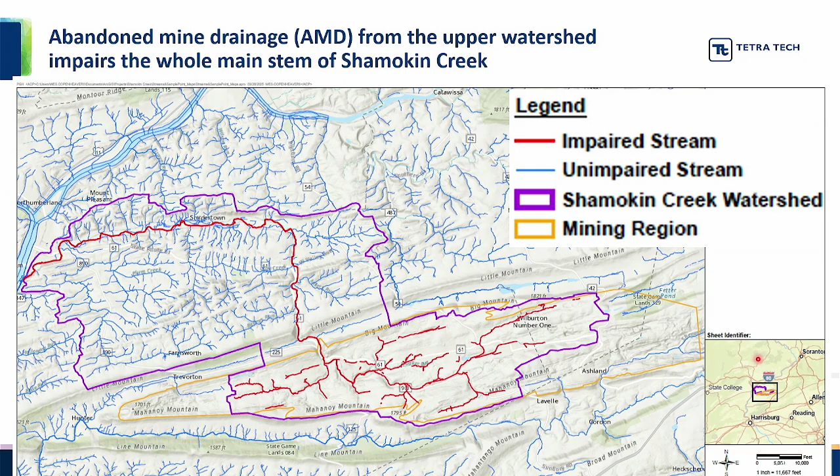And the red lines within the purple boundary are defined as impaired by the state with respect to having an absence of a fishery. And what you see is there's this so-called upper watershed, 54 square miles in the upper watershed, that impacts 16 miles downstream that could potentially be recovered as far as trout fishery goes, or we should say recreational fishery, if we were to manage some of the problems that are sourced from the upper watershed.

There's a very good report from USGS that looked at a lot of the discharges in this particular region, also looked at some of the groundwater conditions with respect to underground mine pools. There's already been work, and I saw John Dawes out in the hallway, and I said, you got the Super 7, but we got the Big 9, right? So the Big 9 have already been identified as some of the largest, most significant discharges in the watershed.

The black line here is that same purple boundary. So now we're focused in on just the upper watershed. These gray regions are the different towns in the area strung together along PA 61. And the discharges are tabulated somewhat in an upstream to downstream location. So the flow is coming from Mount Carmel through Shamokin on its way to Sunbury. The coding as far as the SR dates all the way back to Scarlift days as far as assessments.

And even though there's the Big 9, you can see that there have been identified many, many discrete discharges in this particular watershed. And we've heard a lot of numbers out there as far as these big high flow numbers and stuff. If we just sit right on Scott Ridge, that Q is the algebraic expression for flow, and the subscript 50 is the median or the 50th percentile value of Q from the 12 measurements that were collected most recently. So 50% of the time it's less, 50% of the time it's more.

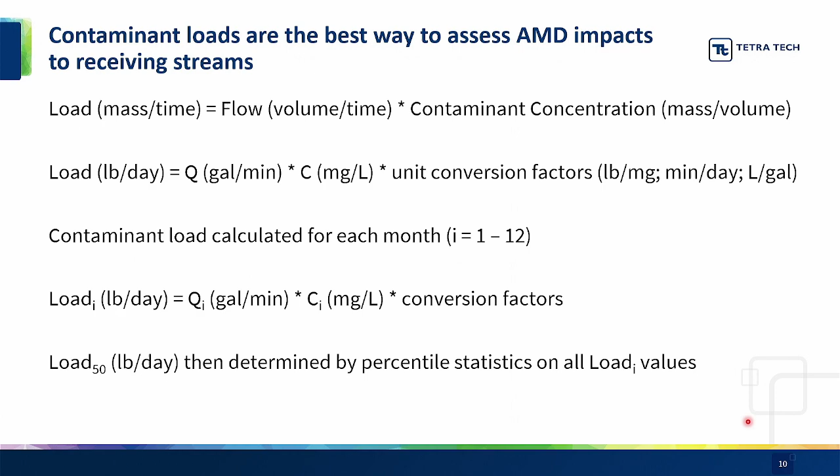And then so flow is one thing, but the other thing is the loads, right? The contaminant loads. And so load is defined as the flow, Q, times the concentration, C, where that concentration could be hot acidity, iron, aluminum, manganese. Those are the big ones that we're looking at, multiplied by a bunch of conversion factors, and then binned to do the statistics on the load values themselves. I'm not going to show you all the statistical breadth of these things. I'm going to show you load values, say, for iron at the 50th percentile. So half the time it's more, half the time it's less.

So if we just look at 50, and thanks to Bobby and EPCAMR, in the sampling strategy, they did upstream, downstream locations on the trib or the main stem for each discharge. So we have a location that is downstream of the discharges. And what we can see is that the water flowing out of the upper watershed is primarily mine drainage, right? 22 over 28 times 100% as far as how much of that is sourced from these mine pools.

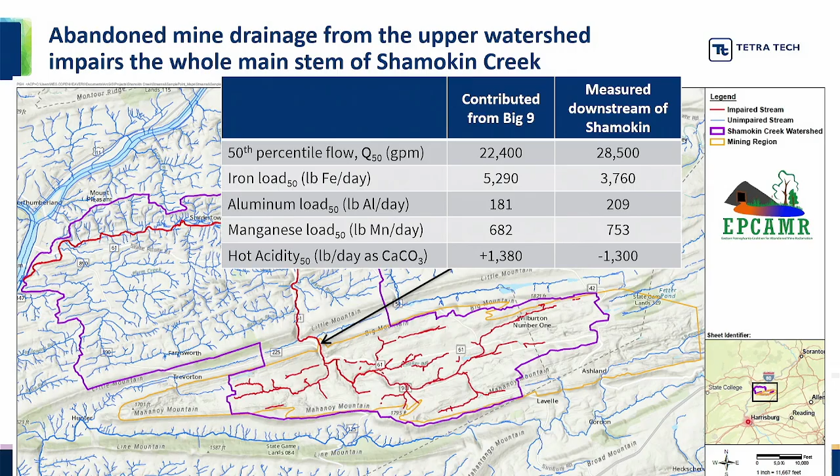The big 9 are producing 5,300 pounds of iron a day, typical conditions. And then we have aluminum, manganese, and hot acidity. We'll talk about each one of these. And I'm going to argue that the big issue is iron, that the iron load coming out of these particular anthracite discharges into Shamokin Creek is the biggest problem that has to be addressed.

Now, at that location that EPCAMR sampled, we see that it's dropped to 3,700 pounds per day flowing downstream. Why? Because of the iron-coated streams that are in between the emergences and that particular sampling location, right? So we're seeing pounds of this stuff being deposited in the streams before it flows below town.

With respect to TMDL standards, there are different permitting structures. TMDL, total maximum daily load, for these particular contaminants. In the case of iron, to sustain a recreational sport fishery, you could allow 100 to 500 pounds to pass town, and then the downstream condition could assimilate that pollutant load. And we see 3,700 pounds. So this is why we have that red stream all the way to Sunbury.

In the case of aluminum and manganese, they're not the primary problems. There is some assimilative capacity for both of those particular metals. And what I would argue is when you run these treatment plants and are precipitating iron oxides, they are going to adsorb manganese along the way, and we can take care of the manganese as we go.

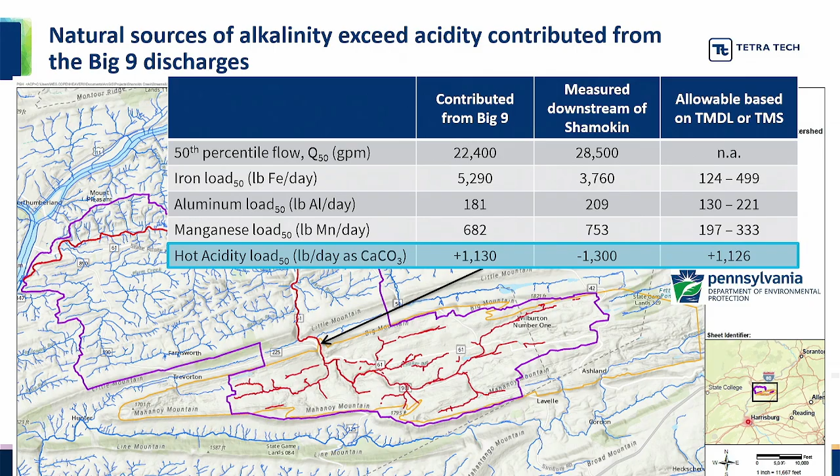And then finally, when we look at acidity, the operational definition is this hot peroxide acidity. In that particular method, what we see is that indeed the sum of the big nine are net acid, has a positive value, net acidic. But if you see the next number over, downstream of town is a negative 1,300. So that negative means that it has positive alkalinity, right? So there are natural sources of alkalinity coming into that system that are taking care of the acidity downstream of town. So again, it's managing the iron load out of these systems.

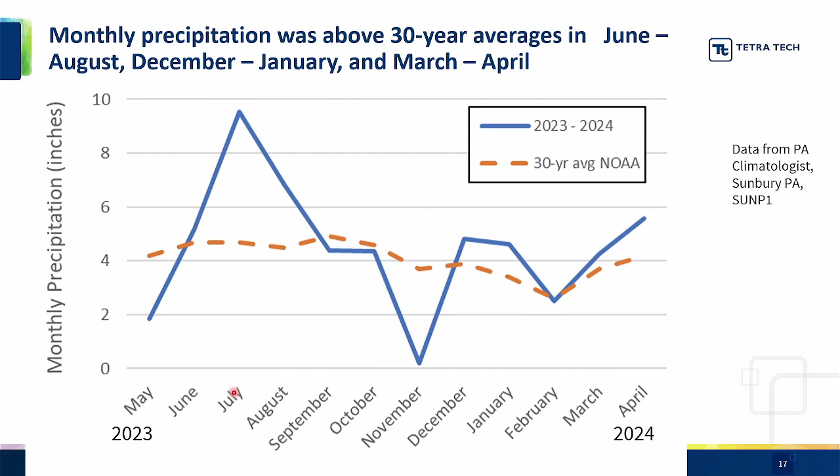And so rainy summer is not high flow in the creek. The high flow in the creek was those high rains that happened in the winter and the spring. The simplest explanation is that soil and plant processes taking up water in the summer are dampening that hydraulic input of the rain in the summer, and you're not seeing that coming out in the stream. But in the winter, when those processes aren't happening, you can have these really high flows coming down the creek.

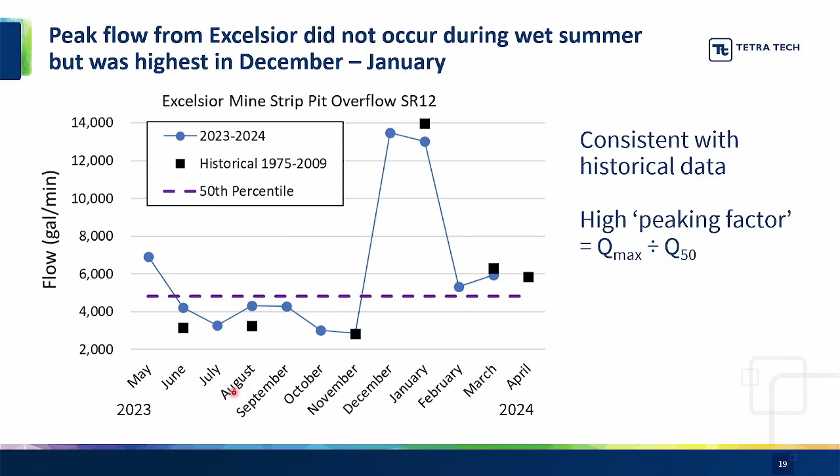What I want to do, though, is compare discharges. Let's look at these temporal patterns. And the easiest way to do that is essentially normalize all these data. So for each discharge, I'm going to divide it by the maximum value that was observed in those 12 events. So now I have a scale that's no longer numeric with respect to gallons per minute, but it goes from 0 to 1. 0 is no flow, 1 is the max flow value. And if you look at the blue lines, they're identical in shape because they've just basically all been divided by this number.

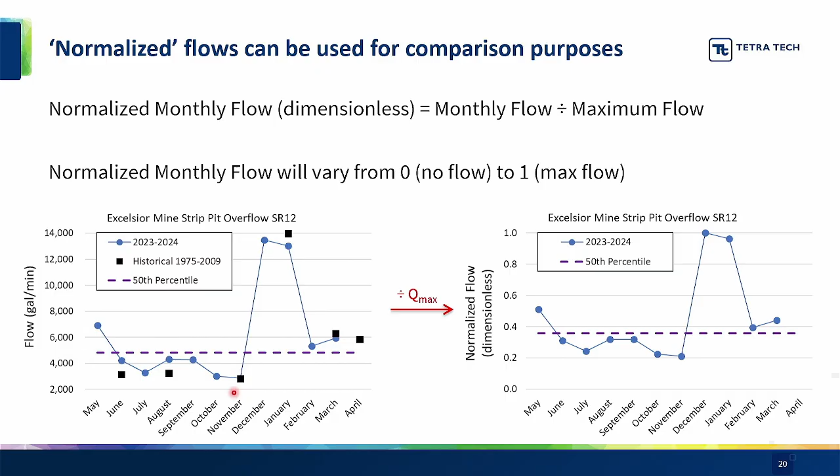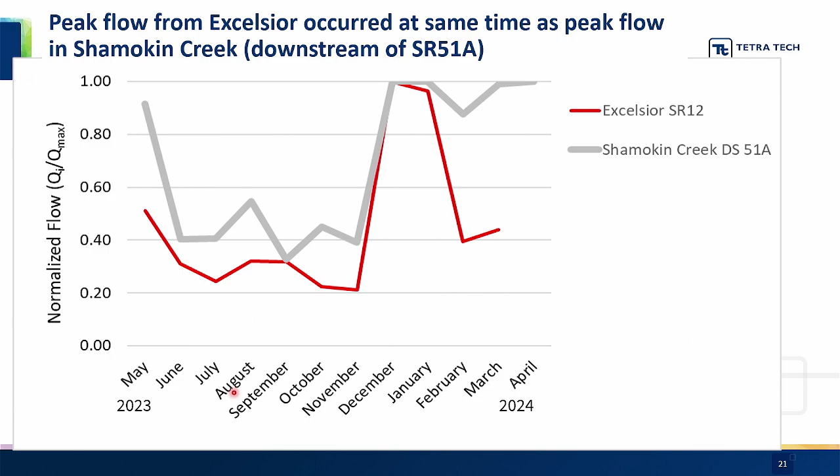And what you see is very good correspondence between the discharge coming out of Excelsior Mine Strip Pit and what's being measured downstream of town, right? Suggesting that, and consistent with, if 22,000 gallons per minute is mine water passing the town that's discharging at 28,000, that the mine pool discharge is what's really pushing out the flows. And again, wet summer, but we're not seeing high flows in the summer. We're seeing it when those soil processes are off and we're peaking during winter and spring.

Scott Ridge, you got to deal with Scott Ridge. It's the largest iron load in the system. It's the largest flow of all of the discharges. Has a lot of historical data. There have been pilot studies. There's been a lot of other groups. That weir has been used by others, let's say.

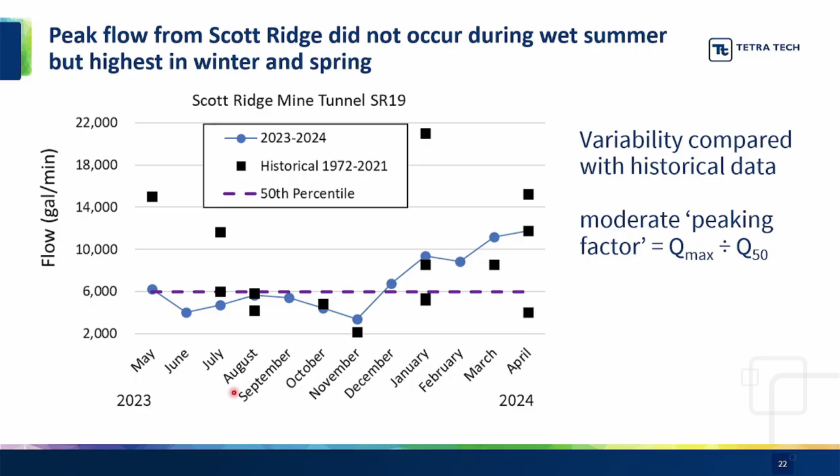And then finally, the Henry Clay Stirling mine pump. I taught a class last spring, and students designed these different treatment systems for these different discharges. And every discharge had at least 5 words associated with it as far as the name of it. And the Henry Clay Stirling mine pump

had some flows that were higher than anything that had ever been recorded before. Almost 18,000 gallons per minute coming out of this thing in April 2024. And other events that were over 12. So compared to the things that were measured in the past, something's happened, or we just had a very different hydrologic year.

But there's also this high, I'm going to come back to this peaking factor when I talk about the mine pools. So in this case, the peaking factor would be defined as like 18,000 divided by 5,000. That numerical value, that peaking factor, is higher for Henry Clay than any of the other discharges.

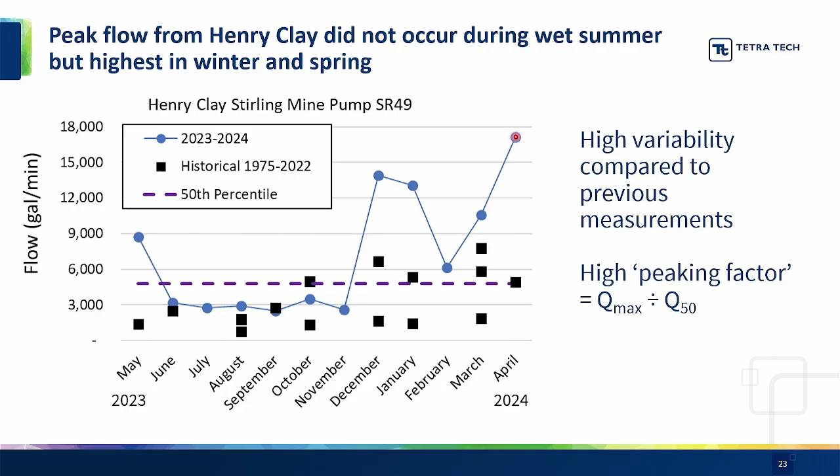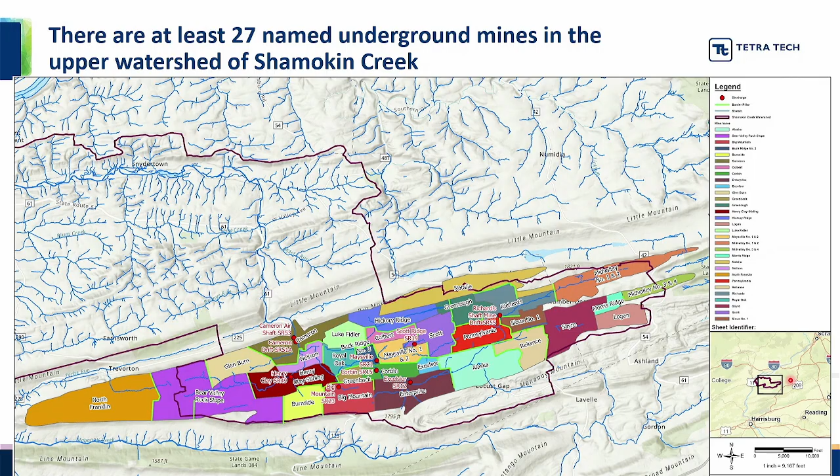Likely related to mine pool conditions. So if we look for named mines from Pennsylvania mine mapping, we will see that the whole upper watershed, except for a few regions, has essentially been mined. But the map view does not convey the complexity of this particular system.

The Western Middle Anthracite coal field is this enormous canoe, incredibly folded. I think Steve Matica was saying that there are mine workings that are below sea level in that particular watershed, that they're 1,000, 1,500 feet below grade, and multiple coal seams that are in this canoe that have been worked in ways to take advantage of shared drain points, or possibly take advantage of shared pumping, or mined out later and unintentionally connected in different ways at different levels. So that plan view of those colored polygons just doesn't represent the complexity.

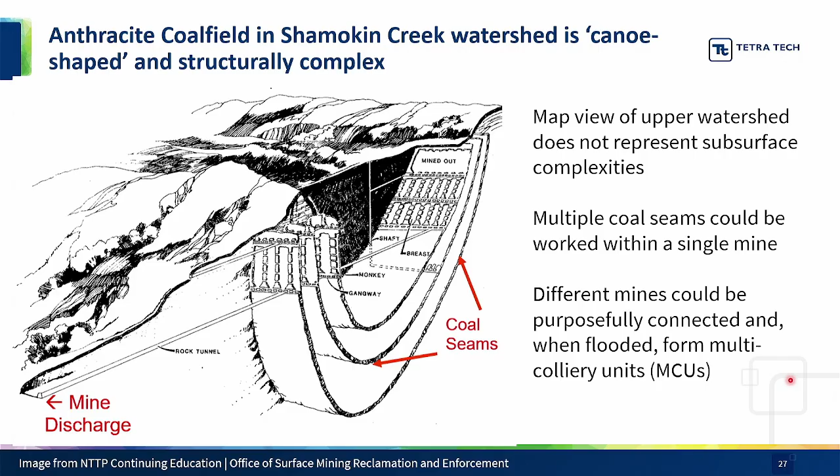And I was talking to Heather at lunch. I'm like, the remediation of this system could be as complicated as landing on the moon, because you don't know everything that's beneath you. But I heard Bobby talking about the 3D mapping of the anthracite coal field, and man, that would help us a lot.

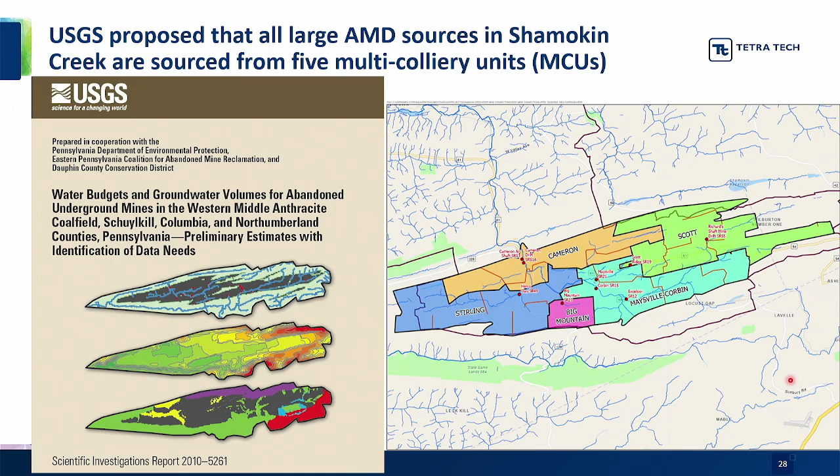So this is another USGS report that was looking at groundwater modeling in the system and came up with this idea of an MCU, a multi-colliery unit. Basically, different mine workings that have been interconnected, okay? And the conclusion from that report was that 5 MCUs sourced all the big 9, but sourced the majority of the outfalls in the watershed.

So in our report that we gave to SCRA, we discretized it a little differently and said, you know what, there's actually 8 mine pools. And the difference is in this center region where there had been 5, there's some overlap and differences in elevations of 20 years of historical mine pool monitoring data, which I'll show you, where the mine pool water elevations have been measured for 20 years.

And so our assessment was that this isn't all one, that these things are actually discrete from one another because those mine pool elevations are fairly stable, at least you'll see it from 1982 to 2003 when all of this monitoring went on. And the difference between 5 and 8 is actually important because when we get to the idea of hydraulic control, capture, and conveyance, if it's a separate mine pool, you need a separate pump, you need a separate line, etc. So our assessment is that there are 8 of these.

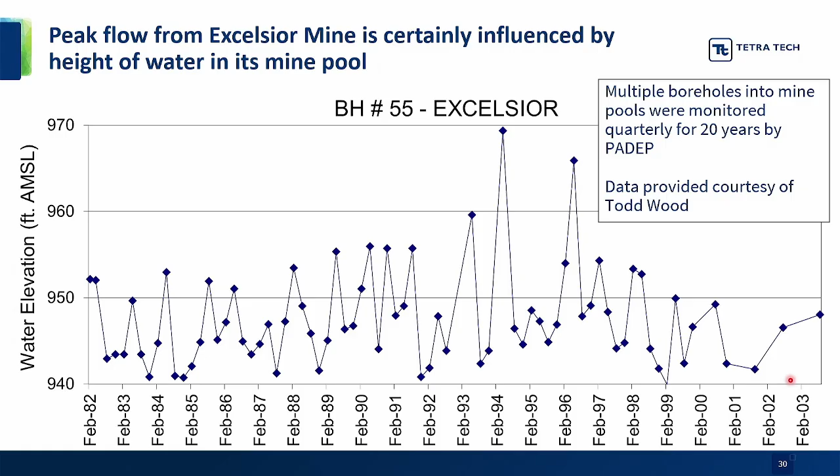So Todd Wood from DEP sent me the Excel file that had all of the Western Middle Anthracite borehole monitoring data. And this one is called borehole number 55. It accesses the Excelsior mine. And you see this fluctuation, in some cases 20 feet over the year. And I'll show it to you on a monthly basis, but you'll see that it's high in the winter and low in the summer.

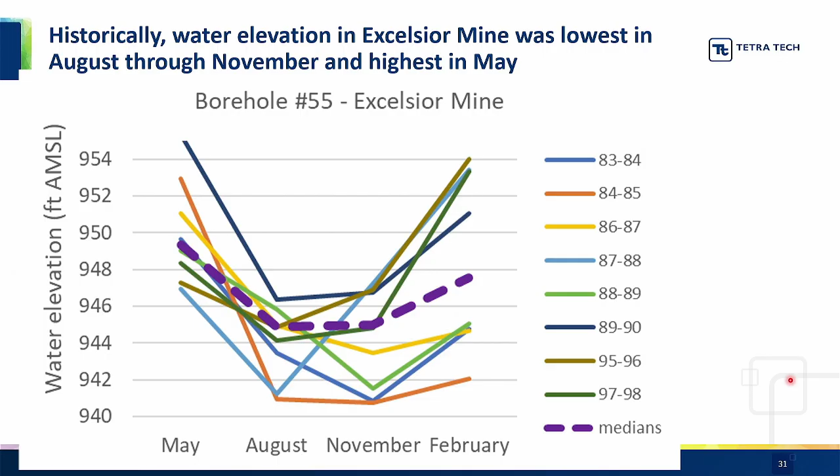And for years they did it quarterly. So for years that had all 4 quarters, I'm showing lines for each year, and then I did medians, so the 50th percentile value of the elevations, and you get what I call the smiley face, right? It's high in the spring, low in the summer, and coming back high in the winter. So similar to what we saw with respect to those discharge patterns. So again, a relationship between precipitation, mine pool elevation, and AMD discharge. You got to work all that stuff out.

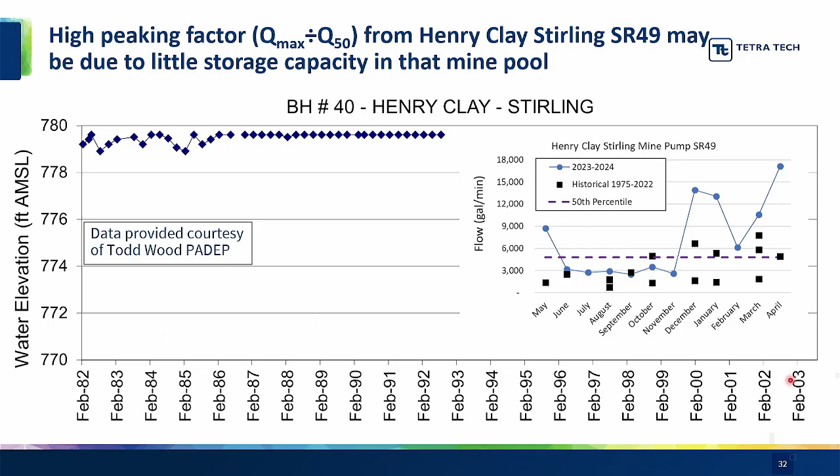But I wanted to also add in the borehole that was in the Henry Clay pool. This axis doesn't span 30 feet. It only spans 10 feet. And the measurements are within like 2 feet. There's very little movement in this mine pool. It's almost like that concrete structure is at the mine pool elevation. There's no storage behind that thing. And so when the flow gets going crazy, it just comes roaring out of there. And so again, it's potentially a simple explanation for why this discharge has such a greater peaking factor than the others, right? And so we need to figure this out for every one of them.

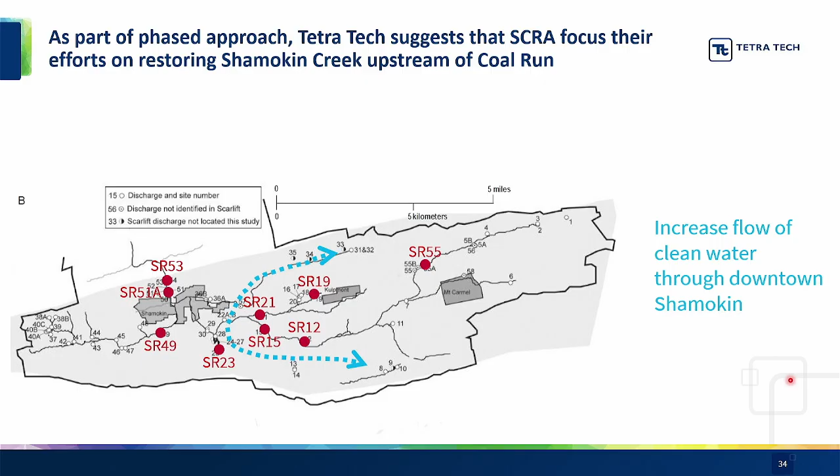Okay, so let's get into that. So our recommendation to SCRA is that let's focus upstream of town, because it's more than just getting clean water into the creek and bringing the fishery back. There's social and economic recovery that we want to happen as well. We want clean water flowing through town. So if you have a restaurant and you have a patio and you're looking at a clean stream. And again, the flow is heading this way into Shamokin, through the gap, 16 more miles. Maybe we restore all of those 16 miles as well on its way to Sunbury.

And it's maybe ahead of the game, but we're calling this the Kulpmont Mine Drainage Treatment Plant. So you got the city of Shamokin, Kulpmont here. I'm going to show you some aerial photography where there's a wastewater treatment plant in Kulpmont. These 4, and I'm going to also show you pumping distances and elevations and stuff like that. These 4 are proximate enough that we could consider combining them into a regional plant.

We focus, though, on Scott Ridge and Excelsior because then we got the 2 largest iron loads in the system coming into one plant. We add the Maysville mine borehole MCU because it's net alkaline, and blend them all together. And now we're talking about an alkaline water to treat. All we got to do is oxidize the ferrous iron. It's going to be a heck of a lot easier.

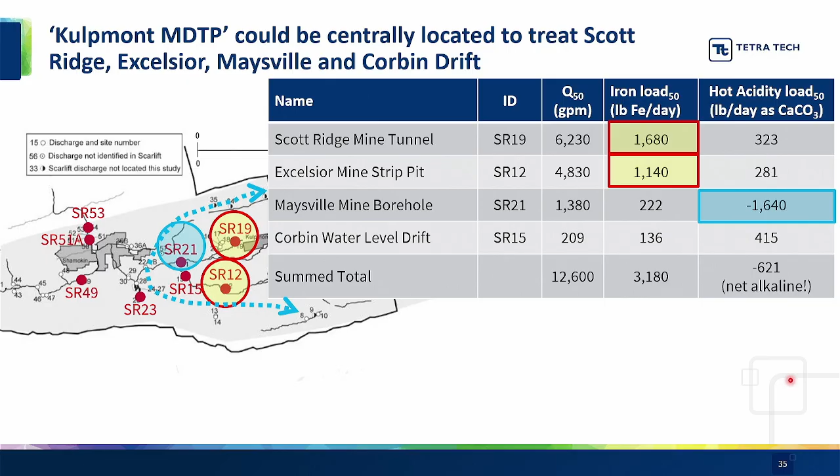Look at some of these numbers though, right? 12,600 GPM median, right? That's the 50th percentile value. But we could remove 3,000 pounds of iron a day. Super high level, right? I'm not committed to these conveyance routes. I simply said, let's string them along roads and hope that we can get property owners that are willing to share utility accesses, right-of-ways that are already there. And so just stringing these together.

And so we're going to talk about, again, capture, control, and conveyance. So you would have an extraction well to capture the mine pool. You'd have to figure out, like, well, what water elevation do we need to draw that down to dry up that discharge? There's your control. And then you got to convey it over to the treatment plant, right? So all of these things have to happen.

So I'm showing you this on the map again. And we are calling this the Kulpmont Mine Drainage Treatment Plant. And it happens to sit right above the Maysville borehole. So at least one of our, if we can get 4 into this plant, one of them we're sitting right on top of. So very short conveyance there. You heard the talk about Blacklick. You heard the talk about the Little Conemaugh.

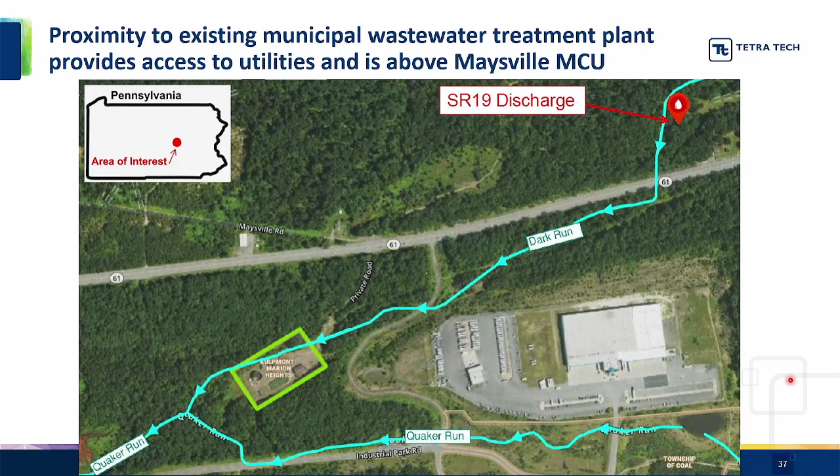So again, capture, control, convey. I'm an environmental engineer, water chemist, process engineer. The treatment plant is not the challenge. If I know what the flow is and I know what the solids is, I can design a treatment system as far as clarifier, that kind of stuff. We can do that. The thing that is site specific every time is who's going to give me the land? Whose land do I have to cross to convey that water there?

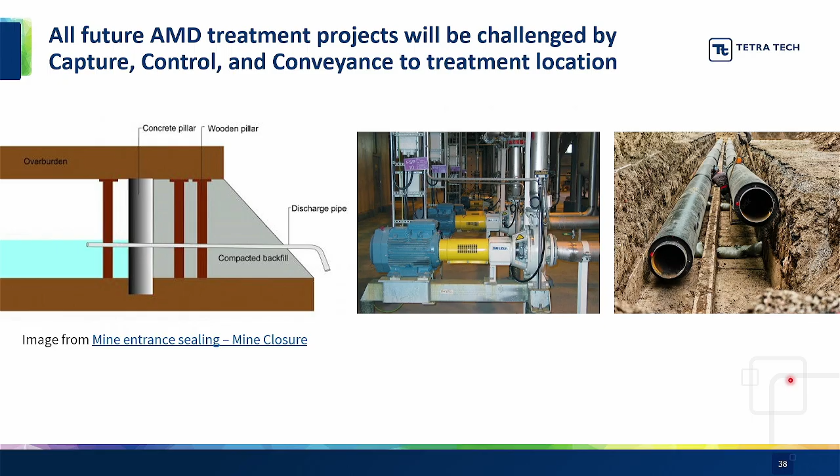So here I'm just showing, like, Scott Ridge, is it a wet seal or is it an extraction pump? So you have to be able to control it. You're going to then have to convey it over to your treatment plant. But you have engineers to do that sort of thing. Still, it's a big challenge. I wanted to show these numbers here just to go back to those traces on the roads, okay? So we're looking at 3-mile conveyance line, mile conveyance line kind of thing.

And then I'm also picking elevations here that are differences between the mine pool elevation, and you're of course going to set the pump lower than that, and the surface elevation of where we think this Kulpmont mine drainage treatment plant is going to be. So in the case of Scott Ridge, we might be able to wet seal and gravity drain that right into the plant. But there are others, like that Maysville that you're sitting above, that's going to require a fair amount of head to bring that into the plant. So these are factors that would have to be worked into design.

And, just taking Corbin, for example, you would have to factor in whether capturing that discharge is worth the money that you're going to pay to pump it and convey it over to the plant, right? So these are decisions that are made in like the next phase of the project, right? You have to work the numbers out to make the decision.

We can do some relatively simple blending calculations where we take the flows. In this case, I'm showing the 90th percentile as a candidate for the design of the plant, the capacity of the plant, as compared to the typical. And then we have the pHs, and then we'll just take the concentration times the flow, blend them into the combined flow, and we get the highlighted number at the bottom.

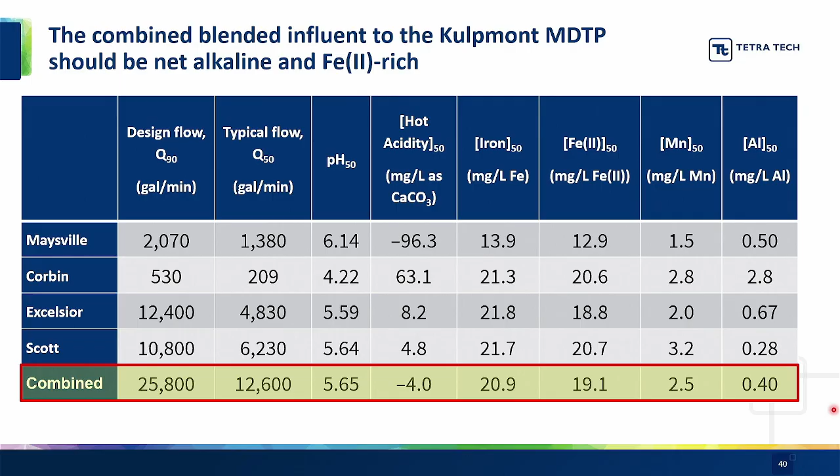The biggie, though, is this number. Right now we're talking 26,000 gallons per minute. And that's a negotiable, that's something you work out with DEP and others as far as how should we spec the design size of this.

And people have gone in, I've heard coal miners say, a good coal miner doesn't leave any coal behind. And so if you are going to do that and get at these things, you're going to lead to these crop falls, these subsidence areas. So now in the canoe of the upper watershed, you have infiltration at the very top, but you also have leaky sections at the very bottom. So you can get losing and gaining streams. We care about losing streams just like we care about crop falls, because they are going where? To the mine pool that we are pumping out and treating.

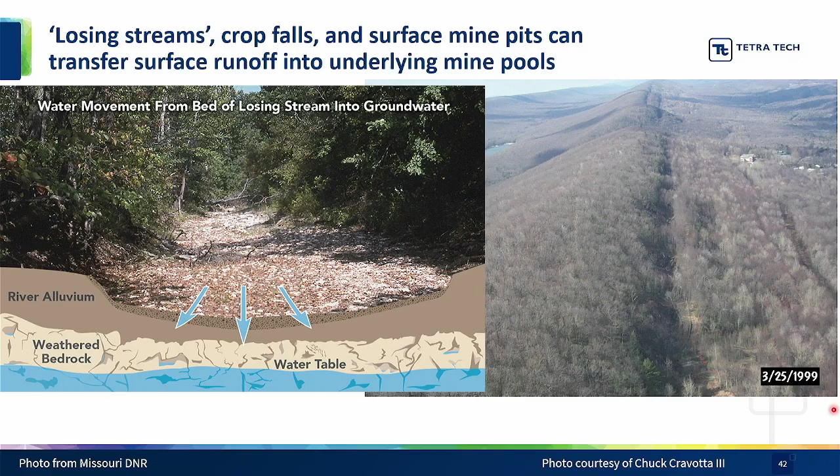So you got to have a holistic plan. You got to reduce infiltration as well, because then maybe we're not at 25,000 or 26,000 gallons per minute sort of thing. So the USGS in their subsurface modeling report discretized the whole watershed. This particular boundary here is the Shamokin Creek. You don't have to worry about the scale so much, but green means that segment discharges the amount of water that it's receiving, essentially. So it's on an even water balance. If it's red, it's a losing segment, and if it's blue, it's a gaining segment.

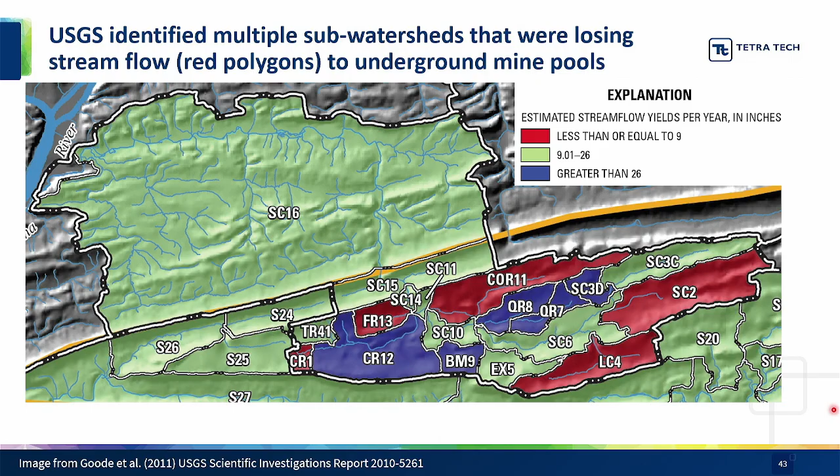And what are the blue ones? The big mine pool discharges, right? They're where the big 9 are located. The red are these parts of the watershed that are known to be losing flow. So we know spatially where to go with respect to focusing on stream sealing, infiltration at the bottom. The crop lines, now I think about drones and using temperature sensors and other things. We should be able to completely map out all of those crop falls as well and go and start sealing those things up.

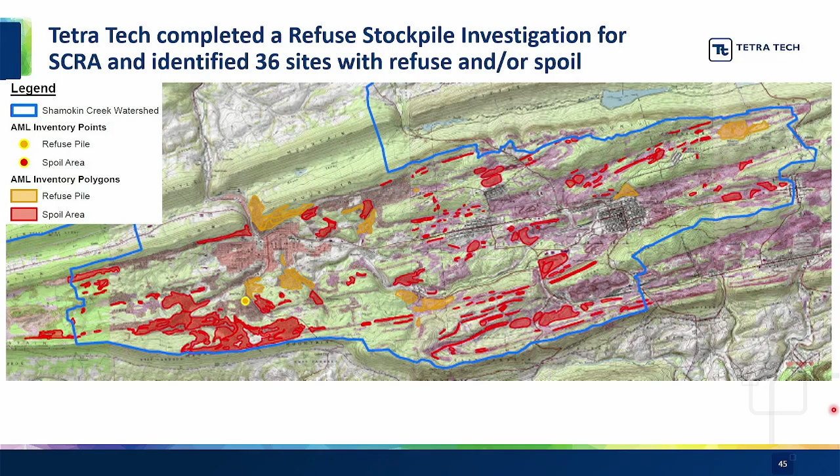So Tetra Tech did a separate report. So this is the watershed assessment report. But previously, Tetra Tech did a big refuse stockpile investigation and found lots of refuse in that particular area. There's a project ongoing with respect to Big Mountain, but any of the sort of refuse that could be addressed is going to improve surface water runoff. There's also some ponds that are probably very much like leaky streams that should probably be assessed as well. So there's these AML features, abandoned mine land features, different than all of the AMD stuff that I was talking about. Okay.

So in the summer, the big 9 are 100% of the water going downstream of town. And most of the time that's 85% or something like that, right? So the big 9 are a huge source of water to Shamokin Creek. We've identified that Scott Ridge, Excelsior, and Cameron Air Shaft are the largest loads of iron. Cameron, again, this is the most downstream one, was the largest load of acidity.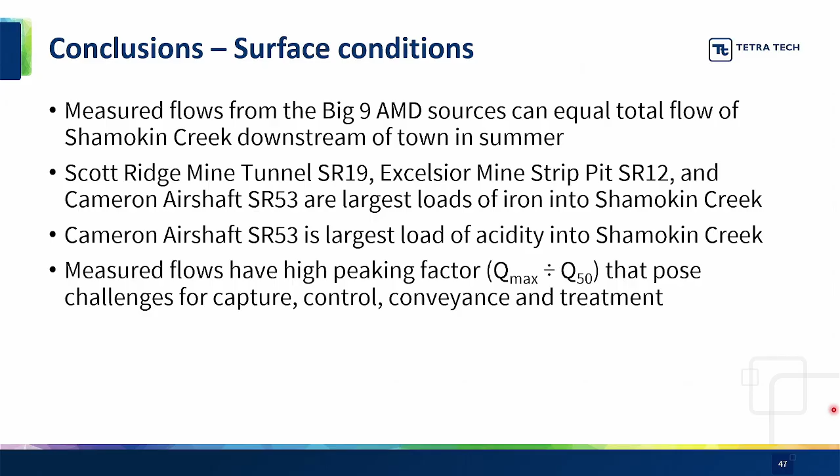And again, getting back into the engineering side, the peaking factors on these things are really going to be tricky as far as how you're going to handle conveyance of things that might go from 1,000 to 18,000 gallons per minute. And so that's kind of why I'm excited to work on this project.

We think there's 8 mine pools instead of 5. And again, it does matter how many you think there are with respect to control. And those 8, we talked about the big 9, but those 8 actually have 20 AMD sources with them. And so you start controlling those and you get more than the big 9, depending on where you put that so-called water control, mine pool control elevation.

You know, we've seen these high fluctuations, which is good, which means we have storage if we have to do maintenance on the plant or something like that. But we saw others like Henry Clay that appears to have no storage. And then this is the future work. You really have to nail down, in fine detail, the relationships between precipitation, mine pool elevation, discharge, probably at an incredibly good temporal resolution to have a strong confidence going forward in designing a plant.